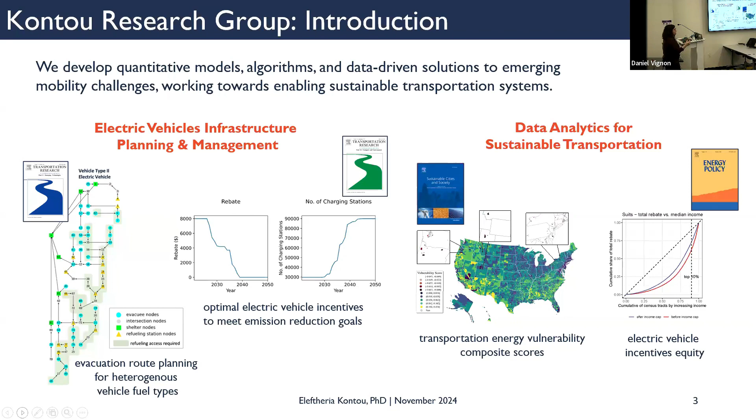Last but not least, we conducted a very well-cited study looking into the research question of equitable allocation of electric vehicle incentives. We examined the Clean Vehicle Rebate Project and we demonstrated that the early rebates for electric vehicles were primarily allocated to wealthier consumers, while policy mechanisms such as income caps resulted in more equitable allocation of the incentives in the aftermath and as time went by.

The driver for our work is, as I mentioned previously, the decarbonization challenge. We know that the transportation sector is the sector that relies primarily on fossil fuels, and overall, in a global setting, 31% of the carbon dioxide emissions are attributed to transportation use. So when we're thinking about decarbonization opportunities, in the portfolio of the transition, massive shifts towards electrification seem to be a subset of the solution space, right?

So without changing our lifestyles, particularly in the United States, transition to zero tailpipe emission vehicles is an effective solution towards decarbonizing a portion of transportation when effectively matched and coupled with clean electricity generation, so the integration of more renewables, while also coupled with other solutions such as public transit electrification, active transportation, systems development and investments for safer infrastructure, as well as attitudinal and behavioral changes that can be induced both by technological advancement and by market-based design mechanisms.

At the very same time, as scholars and the next generation of engineers, we need to rethink the objectives that we set as a goal for our infrastructure in transportation system planning. And I say this because we see that often our investments tend to disproportionately negatively affect disadvantaged communities and communities of different socioeconomic statuses. So particularly as we expect greater impacts of climate change-induced hazards, we need to be cognizant of how funding is being allocated to meet goals of diverse communities.

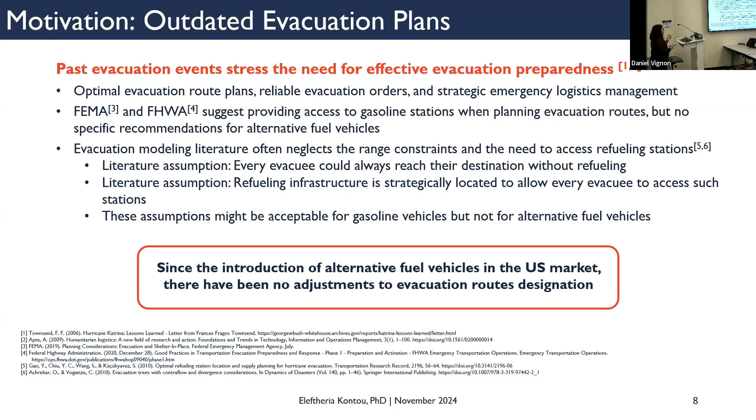And interestingly, we've done an analysis in South Florida, where we center our focus, where we find out that gasoline stations are available almost every 2 to 3 miles on the network. So pretty ubiquitous, not a problem there. That's not the case with alternative fuel vehicles.

When we are looking into battery electric vehicles specifically, we need to highlight the following shortcomings. The battery driving range of battery electric vehicles is 60% on average of that of a gasoline vehicle. The network is sparser, and it's okay that it's sparser, but what matters is also that a charging session is much more time consuming than a gasoline refueling session.

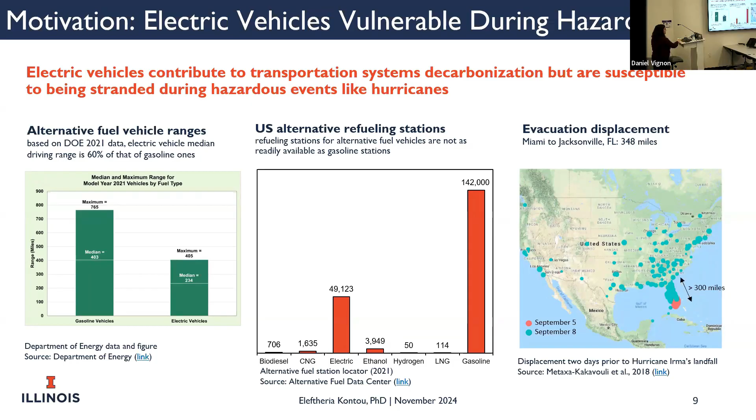Last but not least, evacuation displacements tend to span distances that are often larger than the driving ranges of contemporary electric vehicle models. You can see an instance from Hurricane Irma's landfall, a study conducted by Metaxa-Kakavouli, which demonstrated that users of the transportation network tend to find shelter from Miami in locations like Jacksonville, or even crossing state lines. So in these instances, charging infrastructure is necessary to facilitate evacuation.

So we are modeling the diversity of vehicle fuel types. Concurrently, users of gasoline, battery electric, and other potential fuels on the network can be accounted for through our modeling exercise. And we have the following routing characteristics: seamlessness, where we provide one path to the shelter for every evacuee origin. This reduces confusion and enables better coordination from the agencies and enforcement efforts.

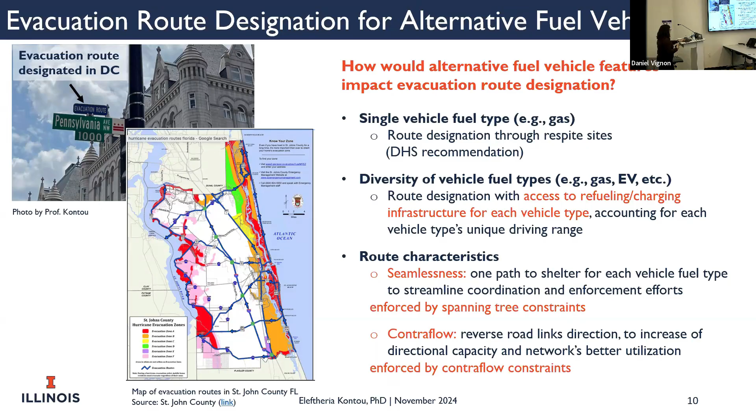Okay, the preemptive evacuation route designation is going to be fast, seamless, account for contraflow traffic control, account for refueling or charging time for these alternative fuel vehicles, guarantee access to chargers or refueling stations, and address the diversity, different shares of different vehicle fuel types on the network.

We're going to determine evacuation routes concurrently for K vehicle fuel types under an assumption of existing independent networks for those vehicles. And that's important because network providers are industry entities who deploy infrastructure without really any examination of evacuation issues, right? They do that in order to maximize utilization, serve demand, maximize electrified miles, or maximize profit, whatever their objective is.

It's meeting habitual travel patterns, not really evacuation infrequent needs. So we have a K minimum spanning tree problem for K alternative fuel vehicle types and hop constraints that enable us to capture the refueling or charging needs for vehicles with limited driving range.

And here's the conceptualization of the notion of the hop constraints, because that's an important consideration. We are going to assume tau sub k being a natural number of transportation links whose summation of distance is a proxy for the driving range of the vehicle fuel type K.

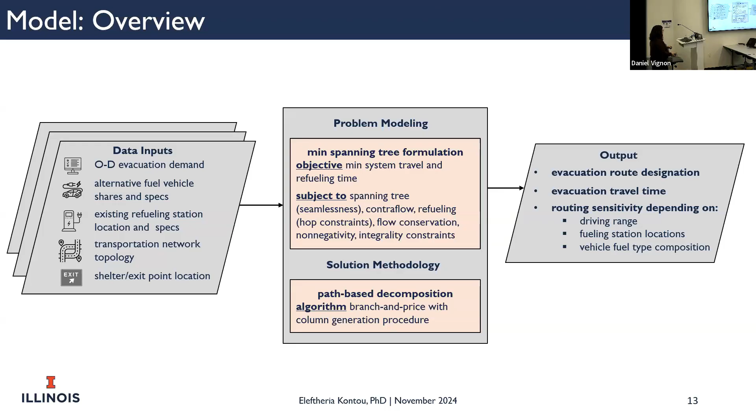Okay, so I just want to focus on conceptualizing the problem. In our objective function, we are minimizing in the first addend the total system travel time. We are capturing congestion, so we're using a Bureau of Public Roads function. Average link performance depends on the vehicle flow, plus the total system recharging or refueling time is accounted for.

In our constraints, we have flow conservation, really important in the network setup, but we also have tree and subtour elimination constraints. These guarantee the property of seamlessness, so one route to safety for each vehicle fuel type. Then we have the contraflow principle, and this needs to hold at the network level for all vehicle fuel types, meaning that each link can be only utilized in one direction, and this should hold for all vehicle fuel types on the network.

We have evacuation tree constraints that pretty much track the location of the evacuees on the network with respect to the shelter, and refueling hop constraints where we track the need to reroute to access refueling infrastructure on the way to safety, maintaining the structure of the evacuation tree.

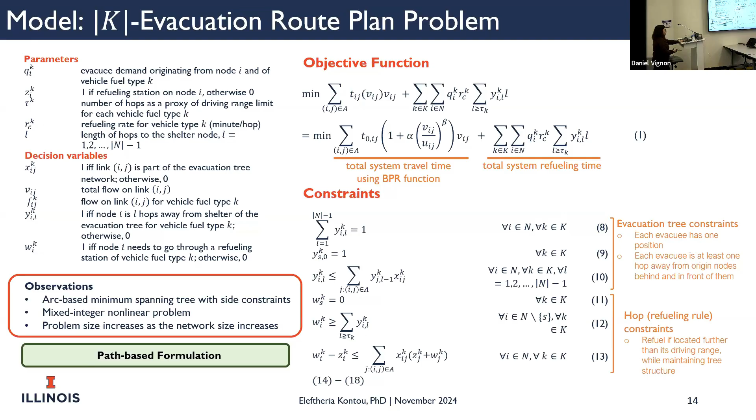Okay, this is a link-based formulation, a mixed integer nonlinear program. The size of the problem increases as the network size increases, so we are pursuing a path-based decomposition in this process. We still have inefficiencies in terms of the nonlinearity of the link performance function and the integrality of the new variables that we're using at the path level.

This is lambda. We realized that if we relax the integrality of the new variable lambda at the path level and we fix the link performance, then the path-based formulation allows for a Dantzig-Wolfe structure, which is solvable with column generation. And we pursue the following algorithm. We start from a path-based reformulation because we have the link performance function that is dependent on the flow. Then this would dynamically change as the flow changes.

So in a restricted main problem, we seek an evacuation path that essentially minimizes travel time out of the set of feasible solutions that adhere to path-based traffic assignment constraints, tree constraints, and contraflow constraints. From this process, if we are able to fix the flow and deliver the link performance, we are solving a pricing sub-problem, trying to find an improving evacuation path for each evacuee zone and vehicle type that adheres to shortest path constraints, hop constraints, and refueling decision constraints.

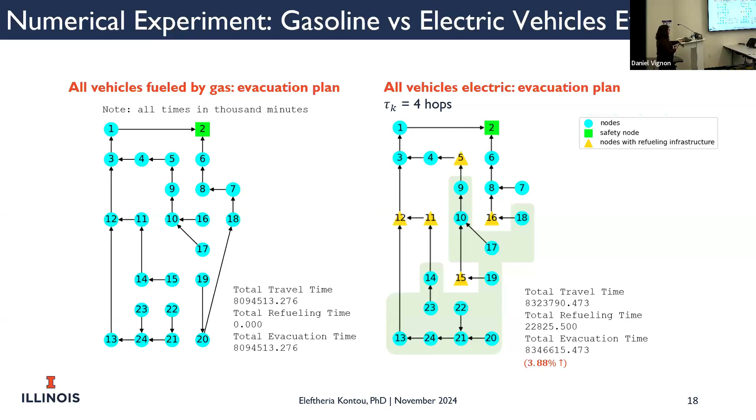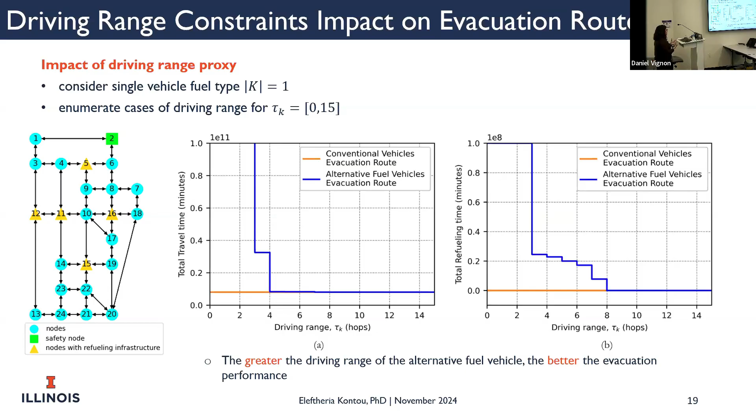If we have only one vehicle fuel type on the network, we are also able to track the impact of the driving range on the evacuation travel time and the refueling recharging time. We can do that for any series of vehicles, but let's review the results for one vehicle type. Here you can see that in this Sioux Falls network, a vehicle with a range shorter than 3 hops is infeasible with the current charging infrastructure deployment. For 3 or more hops, we have feasibility and we are able to access the safety node at 2. The greater the driving range for the alternative fuel vehicle, the faster the evacuation process, and the lesser the refueling or charging time.

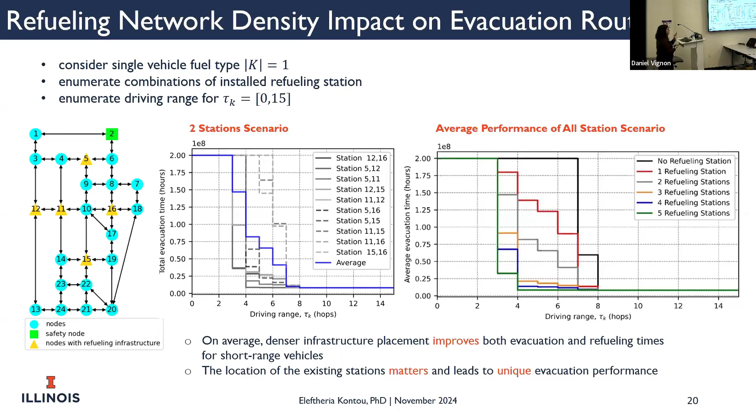Of course, location matters. If we take pairs of stations deployed at these potential infrastructure candidates, on average we see this improvement, but there are station pairs that would result in infeasibilities even for larger ranges, or the evacuation time will just be longer so that we can reroute everyone through this limited infrastructure on the network.

We deploy our approach in the South Florida region that spans Homestead to Jupiter, including Miami, Boca Raton, and West Palm Beach. We consider that the actual shelter locations are the intersections with major interstates or US routes, where these enable access to the rest of the region and north. And we create a super shelter node. This helps us avoid deciding which destination everyone will pick, essentially sending everyone to that super shelter.

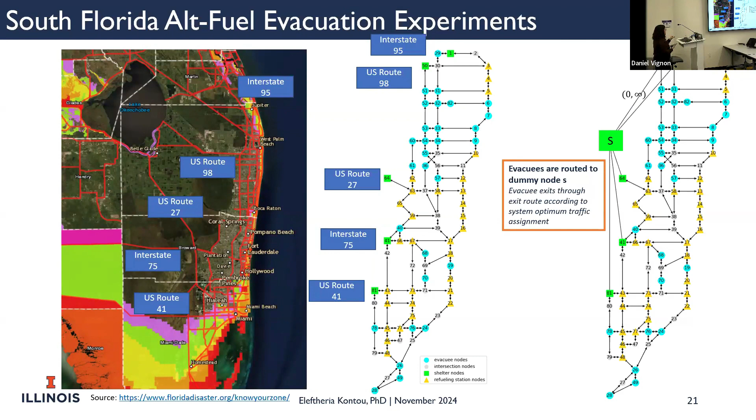Okay, under universal use of gasoline vehicles, we observe that the average evacuation time is 53 minutes per vehicle. And we can still see that there is utilization of refueling infrastructure in the process. As we're introducing shares of different vehicle technologies, so gasoline and electric vehicles, 50-50 in this network, we observe an 85% increase in the travel time. This is important because this means that coordinators should consider these delays in their coordination process.

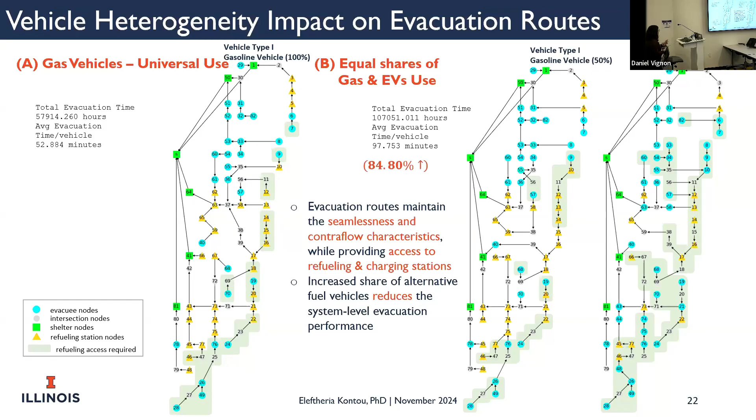And of course, we see here the properties of the evacuation plans that are guaranteed. For example, we see the property of contraflow being maintained, and as we are expecting, the property of tree being maintained for both routes.

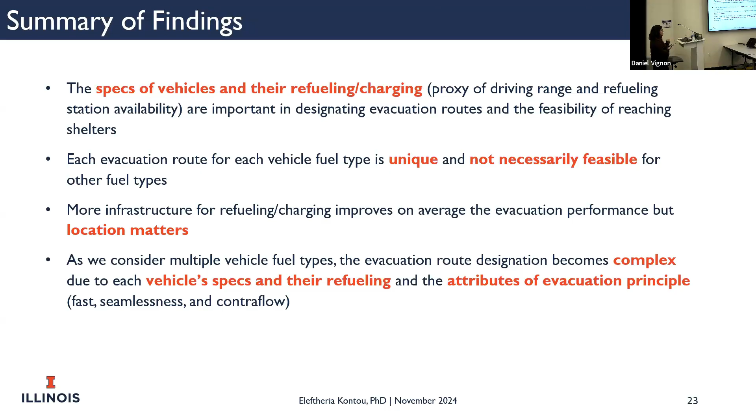Overall, just in summary of the insights that we gained, specifications of vehicles and charging infrastructure matter. The denser the infrastructure, the faster the evacuation. However, location matters, so the deployment can result under a sparse network in infeasibilities. And it's important to also introduce the shares of vehicle fuel technologies and plan for evacuation routes that accommodate their needs.

Naturally, we wanted to study potential for supplementary infrastructure deployment in these types of networks to support faster evacuations. So this is joint work with Denis Apurba and our undergraduate student Simon Balisi. You can scan and access the resource, the paper, and this is partly supported by the Illinois Indiana Sea Grant Scholarship.

Okay, so we started conceptually actually exploring those topics, but then we observed that in 2024, Florida deployed mobile electric vehicle chargers to accommodate evacuation demand. So this concept was actually put into effect by agencies. As I mentioned, charging deployment on the network level is spearheaded by private investments, therefore aims to accommodate habitual needs. Maximizing profit for these entities, evacuation demand is infrequent and not considered in this process.

The goal would be to couple a facility location model with the routing model that we have already developed. And we're going to introduce new constraints for accounting for the need to recharge or refuel on the way to safety that are called hop constraints, and acknowledge that a vehicle might need to stop multiple times on the way to safety and not just once pass through a charger.

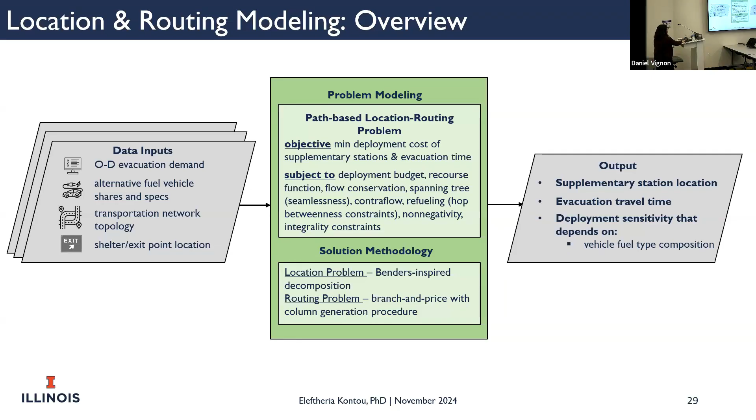In the outputs, we're going to have the opportunity to observe the routes that are created in the process. Of course, when we are thinking about networks designed for shorter ranges, we expect more supplementary stations to be deployed to aid faster evacuations, and this is the case here.

So 4 hops corresponds to vehicles with shorter driving ranges compared to 6 hops. The average evacuation time increases when all the vehicles have this property in the network to 255 minutes per vehicle compared to 249 minutes per vehicle for 4 and 6 hops.

Accordingly, what's of interest, I think, to most is the fact that we can come up with supplementary locations for infrastructure deployment for different vehicle fuel types. So here you see a case where we have dominance of gasoline vehicles in place, 70% share, compared to 15% of shorter ranges and 15% of large range electric vehicles. The latter would constitute Tesla vehicles with supercharger nodes, and the former vehicle type 2 legacy shorter driving range electric vehicles.

In the process, we're able to determine the supplementary locations of infrastructure, and we see that we need 13 additional mobile charger locations. The average evacuation time is shorter now because we have dominance of gasoline vehicles, and these do not necessarily require frequent recharging that increases the total evacuation time.

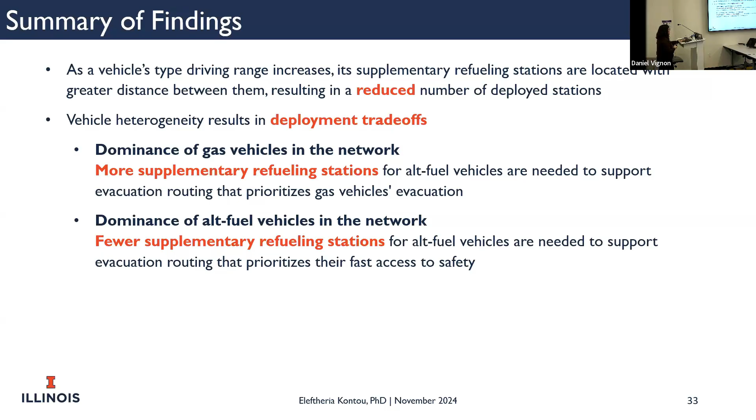Okay, this is pretty much a summary of findings I just articulated, so no need to spend too much time here. We have a few extensions in this phase, thinking about not only preemptive evacuations that suggest that the full network is operational, both opportunities to traverse links on the network without any disruption or accessing infrastructure without any power loss, but we're considering cases of evacuations that start amid the severe hazard impacts, where we would expect potentially network disconnections or power outages impacting certain charging stations.

We compare and contrast preemptive and hazard impacted evacuation cases, and we track changes in travel time, refueling and recharging time, queuing, the number of evacuees that require access to infrastructure on their way to safety, share of stranded electric vehicle drivers, as well as accessibility of charging stations through a graph theoretic metric.

We focus our work predominantly on South Florida hurricane events, so we have categories 3 and 4 to examine. For this work, we need feedback from our FEMA resources and our colleagues that do work in hydrology in order to give us an understanding of where we should expect inundation impacts to be realized in the transportation network. And then we are able to design evacuation routes and also measure the different vulnerability metrics for both electric vehicle drivers and their infrastructure networks.

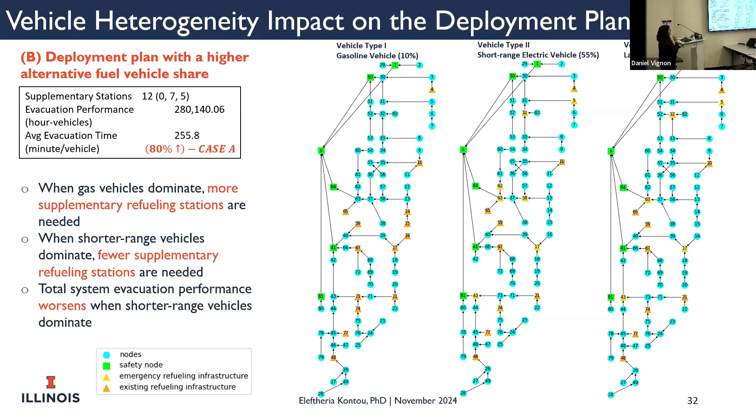In the results that you see here, the fundamental, let's say, assumption is that we're coming up with preemptive evacuation routes. So this is way before the hurricane hits, where there is a mandatory order knowing that the hurricane is going to pass through the South Florida region, but still no impacts have been realized in the location.

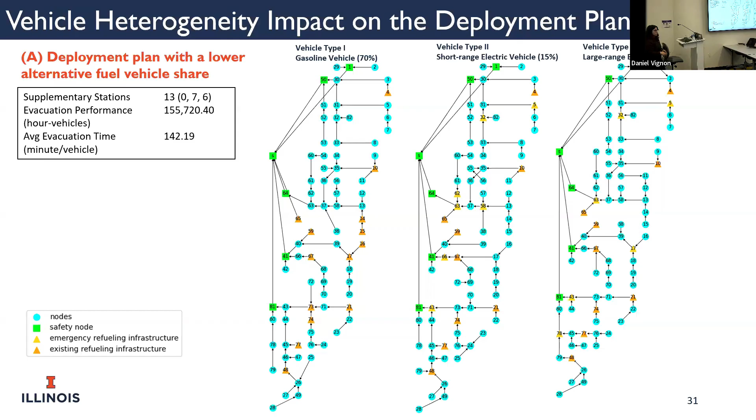For the supplementary refueling stations, is that the mobile batteries that you mentioned? Yes. And is it assumed that before the evacuation process you have the batteries there, or are they going to be delivered during the evacuation? Then this is going to be another set of constraints because you need some routes to those stations too.

That's an excellent question. Yes, I think the assumption is that these are already identified as the locations where they're going to be configured with portable battery storage devices that can provide recharging services.

So what happened during the latest Florida evacuation preparation was pretty much the coordination agency had this information available to the motorists in advance. Just because when the actual event is on the way, it's hard to convey this information. You can imagine that they need to have a dynamic platform where they showcase where these locations of recharging stations are, and I don't think that they have something so robust set up. But that's an excellent research question.

So from an emergency response standpoint, how would the fleets of coordinators be accommodated within this system? I think that's a very interesting research question. Yeah, thank you.